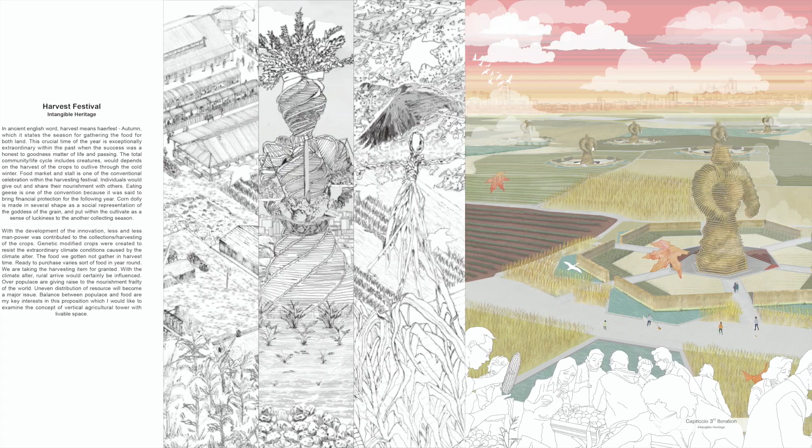A corn dolly was hung up in the hope of a good harvest. Sharing and giving are part of the hidden meaning behind the festival. The concept is articulated as a gift of nature, as seasonal rhythm looking to explore the basics for a community and ecology to develop from.

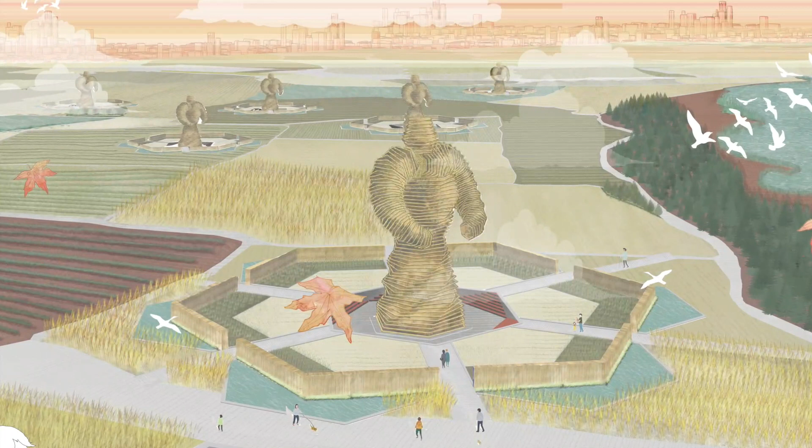One way to explore this is by investigating one of the heritages, which is Harvest Festival. Exploring the physical formation of a totem is a way to define rules and patterns of nature, to become part of the structural strategy.

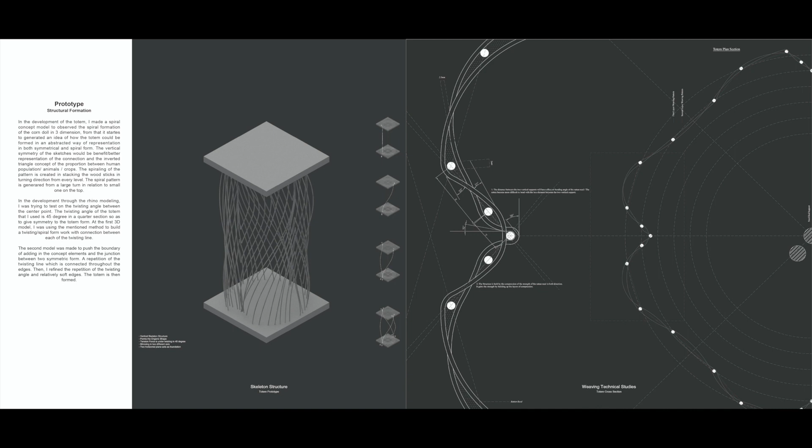The wicker structure is developed from the concept of the harvest, so as to perform a continuous vertical skeleton, aiming to restore the natural habitats for the wildlife.

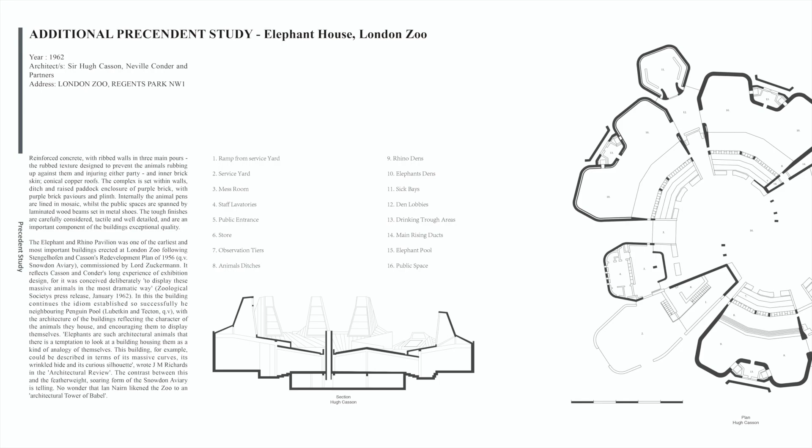The Hugh Casson plan is one of the precedent studies which help in building up complexities, looking beyond the simplicity of scale, in the form of a hybrid totem.

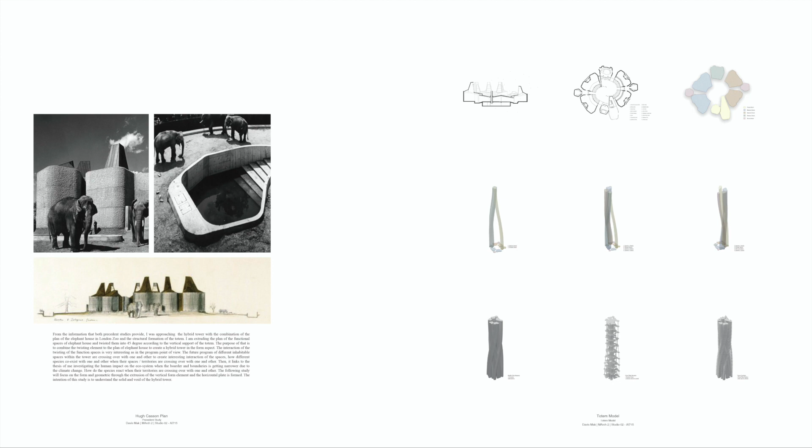A hybrid form of a totem is developed as a study for tower formation, in which extrusion and interaction between the bundle tubes are the strategy in forming the structure. They represent the interrelationship between species as well as the program.

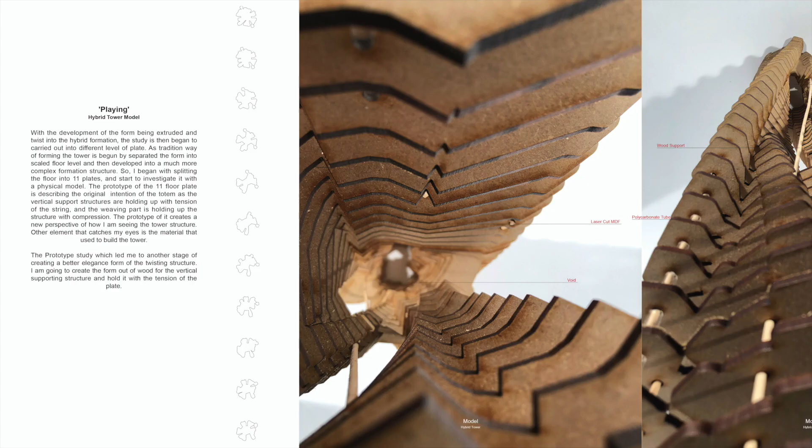The hybrid totem is considered as the prototype for the proposed design. Model making is also part of the fun in exploring the prototype.

Preserving nature is part of the program study within the context of the site analysis. I've created a wildlife research booklet for Ashdown Forest, recording the habitats of different species.

By analyzing the territories and hunting zones of the local species, I've chosen the Old Lodge Nature Reserve area as my site. It has the most interactions highlighted in the studies. The site is fenced and will serve for its own natural environment.

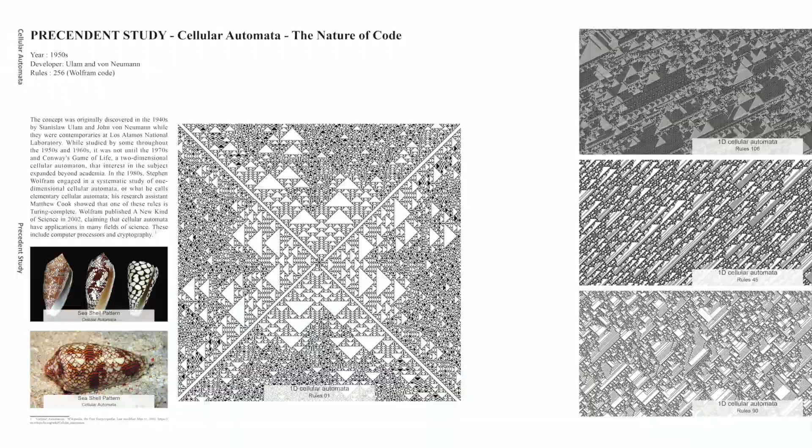Cellular automata is one of the precedent studies which help in form finding. It was developed in the 1940s by John von Neumann. It has been called the code of nature. One of the examples of the rules is the natural formation of the seashell pattern.

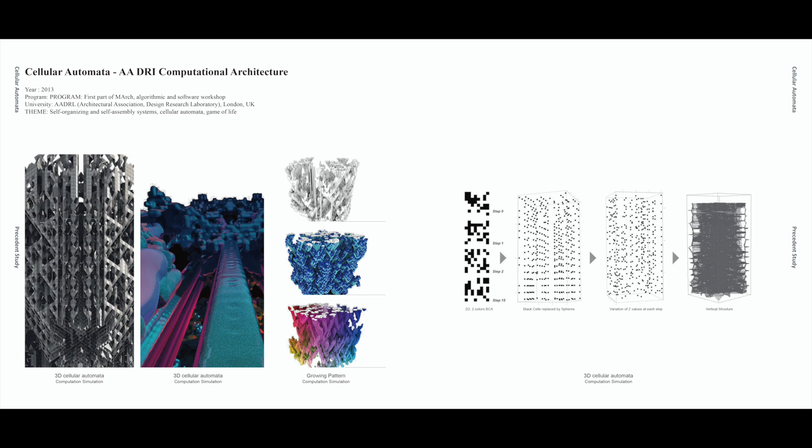The AA department also tests on the cellular automata, writing their own algorithm in simulating the growth of nature in architectural aspects. Software workshops also help in creating the computational architecture.

With trial and error, I have successfully generated my own algorithm in simulating the growth of nature in Grasshopper. By inputting different data, the growth of the root interacts at different levels, gaining support like a tree. The form is then generated by the algorithm, which simulates different stages of the interactions.

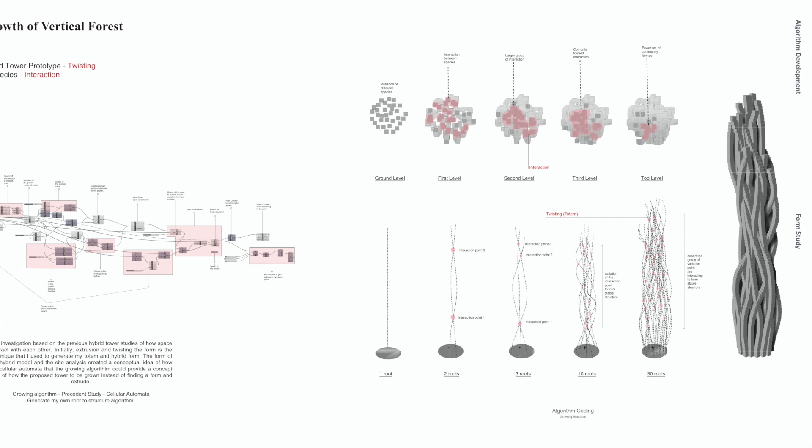Studies have been carried out in the final form of the proposed design. Different levels of interactions could form different spatial qualities of the program.

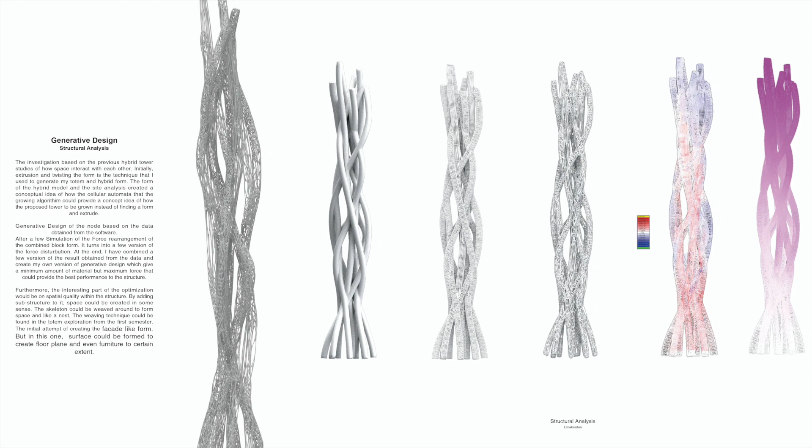Generative design is also one of the applications in minimizing the structures as well as creating barriers for better inhabitation of the species. The formation of the skeleton is developed in 3 layers.

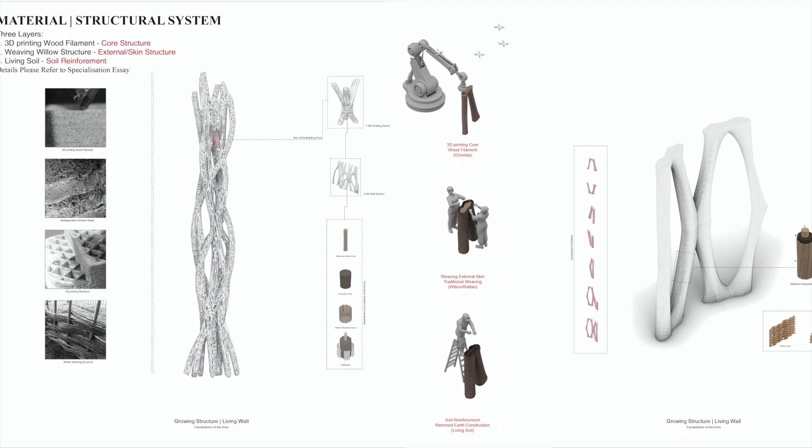The core is built by 3D printing technology. The external skin structure is built by rattan weaving. The living soil is then integrated in between those layers.

These are the model prototypes, which help in the development.

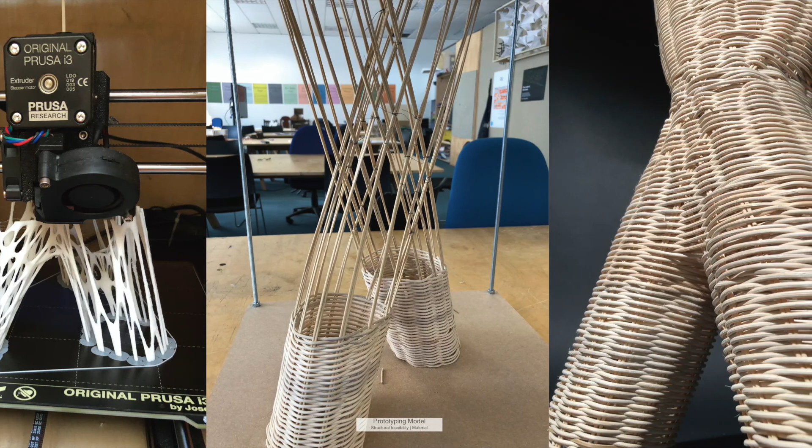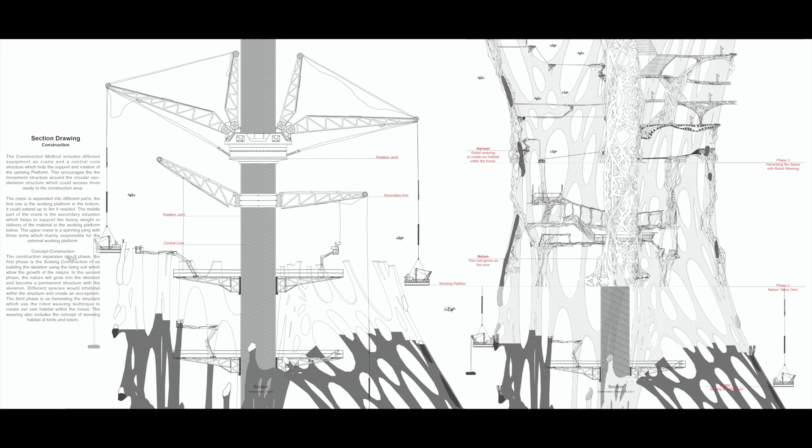The construction separates into 3 different phases. The first phase is us building the skeletons. The second phase is about nature inhabiting the space. The third phase is us using robot technology in creating our own spaces within the structures.

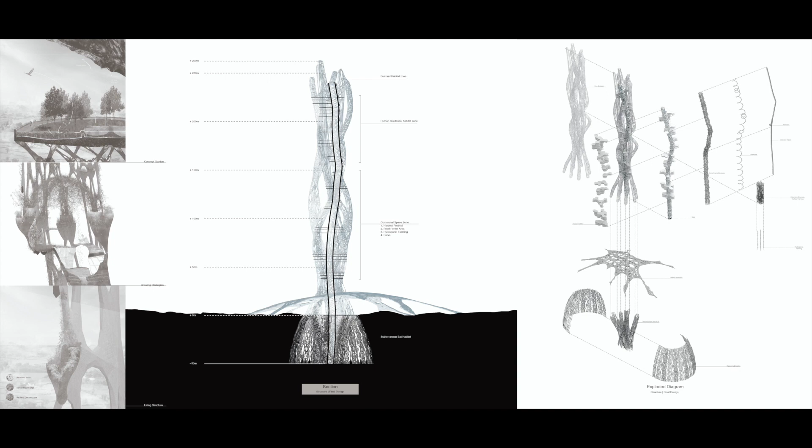This is the final design proposal. The wood truss core is supporting the skeletons, holding them in position with the weaving floor plate.

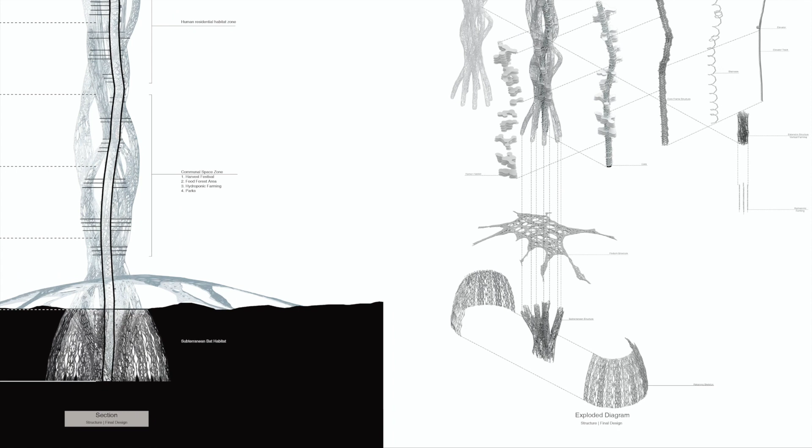A podium helps in stabilizing the root structure and helps gain support with the tower. A root system is applied to the underground, acting as a foundation structure to the design.

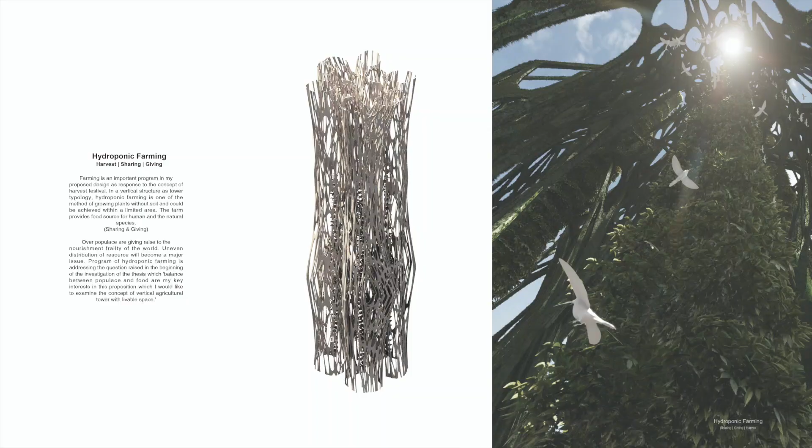One of the design programs is the hydroponic farming area, which demonstrates us sharing and giving with nature.

The food forest also demonstrates the idea of biodiversity in generating different food sources for different species around the forest.

The communal area, which acts as a park for both culture and nature to inhabit, also demonstrates the idea of sharing, giving the space with nature.

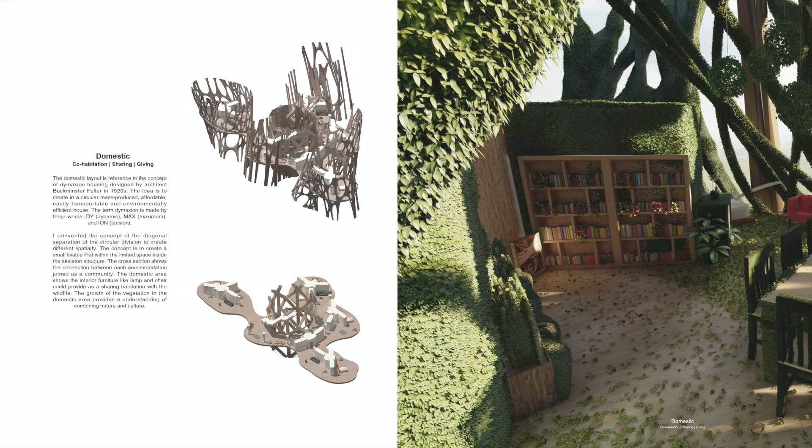The domestic forest area also demonstrates the cohabitation with nature. The floor plan is developed from the idea of the dymaxion house.

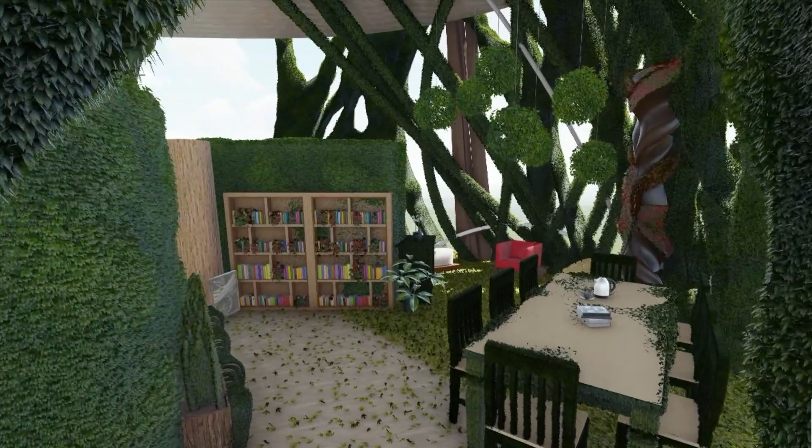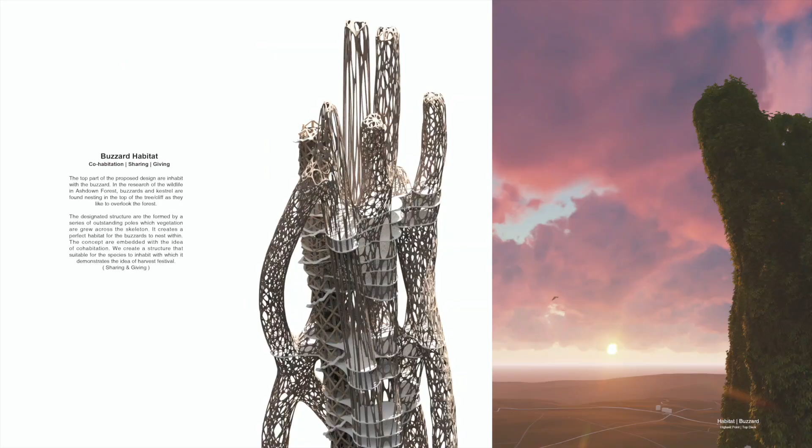The subterranean structures also provide conditions for the growth of the ecosystems between the bats. The top of the tower is the habitat for buzzard.